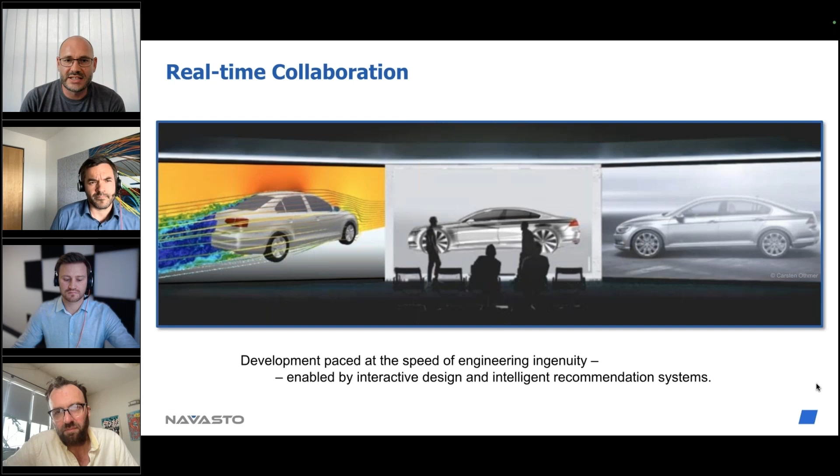And one of the examples that came out of that is, for example, the interactive design. On the next slide, the video you see is mostly Blender, but in the back end, there is a deep learning model that can be accessed by simply clicking a button. So this idea of interactive design and disciplines working together like design, like aerodynamics in a room is what's on this screen here.

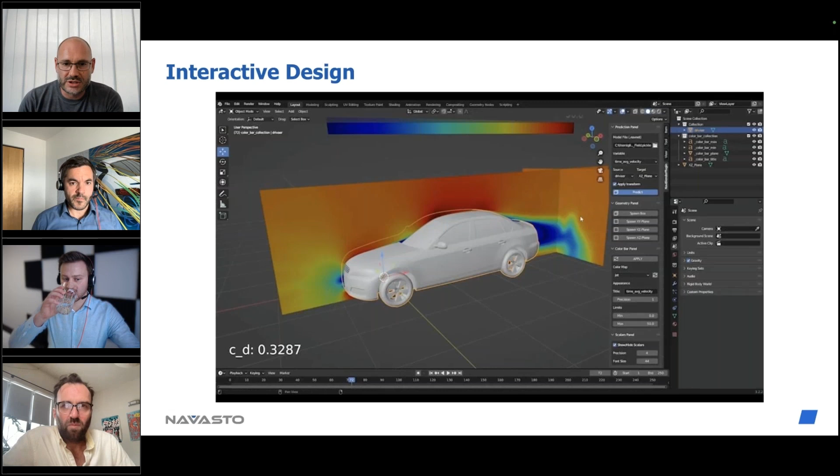So you can simply grab the mesh, modify the geometry, and instead of exporting it and running a simulation, you can query the deep learning model, you get an insight into what's happening in real time, and you can then decide what's the next best step. So this is one of the benefits, one of the use cases we see, bringing together engineers and designers.

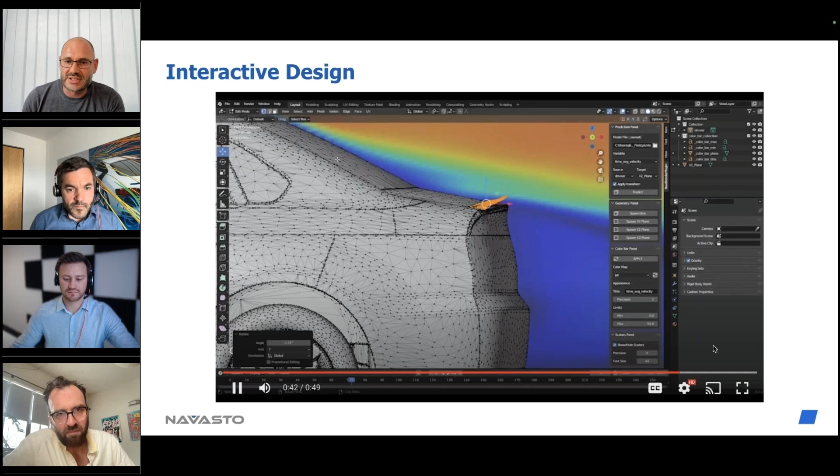And once you have such a predictive model in place, the next logical step is, of course, to also couple that with a generative model. So if you go one slide further, exactly. So on the left-hand side, what you see is a geometry that's created using a neural network that can be exported and used directly for a simulation, but it can also be coupled to a well-trained deep learning model.

So what you have here is a way to create a geometry, a way to evaluate a geometry, and if you couple that with a machine learning based optimization tool, for example, then you can close this loop and you can evaluate hundreds of geometries in parallel on GPUs, and really over the time it takes you to get a coffee, find either an aerodynamic optimum, for example, or scan the design space for possible solutions.

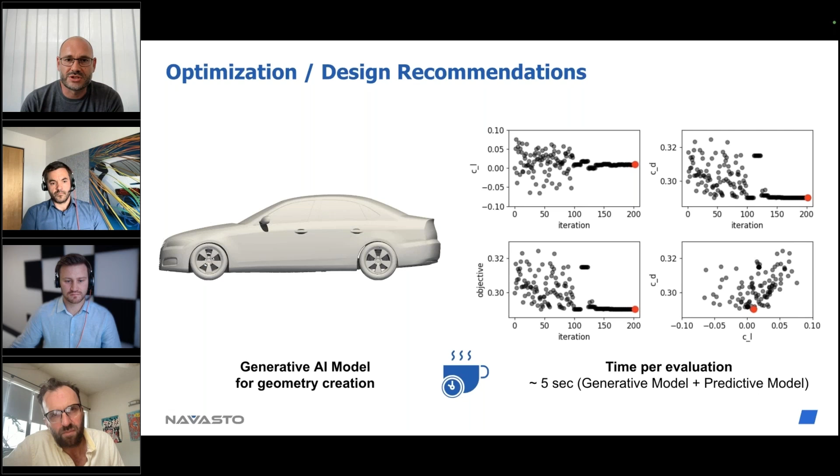So at the end of the day, I think the most important part when using machine learning and deep learning in the engineering context is the pick of the correct use case. And examples of that are the left shifting of physics-based insight, like illustrated in the interactive design tool, optimization and design space exploration. It's a side-by-side integration as SimScale has built it. And of course, I think in the midterm, it's going to connect the company knowledge, all the data that has been produced and is produced in those large engineering companies with the workstations of the end user.

Perfect. Thanks, Matthias. So yeah, the final introduction is over to David for the SimScale side of things. Thanks, Steve. So Steve said it initially already. I think you said it. I'm committed to it. If you do one slide more, I think there we have it.

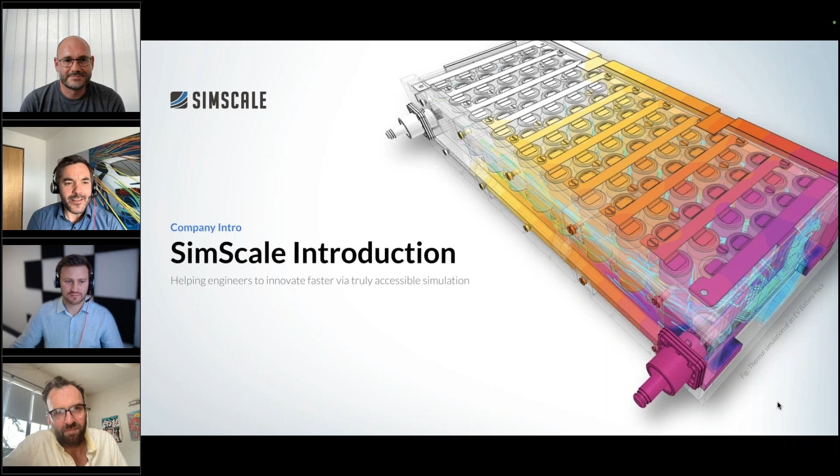Yes. So we see ourselves on a mission to help engineers innovate faster by making simulation truly accessible. And yes, this is a bit of a marketing slide, admittedly, but in that statement rings that SimScale is not about one specific method, one specific solver, one specific preprocessing technology. It's about how can all of this technology be deployed into broad engineering teams, broader engineering workflows, into the design loop to enable an engineering organization to explore the design space faster, deeper than they could before.

And so for that, we started off, and still most of our usage today is on traditional PDE solvers, finite volume, finite element, LBM solvers. But they are deployed into the loop, and we've seen that, Steve, if you go one further, to effectively deploy simulation broader into engineering organizations, it's not sufficient that you just have one well-functioning method or one well-functioning solver.

It starts with the fact that you need to manage all of the data that's being produced, and then you need to manage users and processes around it. How can you enable a program engineer to make informed design decisions without knowing which specific simulation method has been used? So there's a piece around process management and governance, which we can see in the top right, user and process management. Then all of that needs quite a bit of computational horsepower, depending on the method, depending on how many simulations you want to run. So you need to build in HPC management, HPC provisioning.

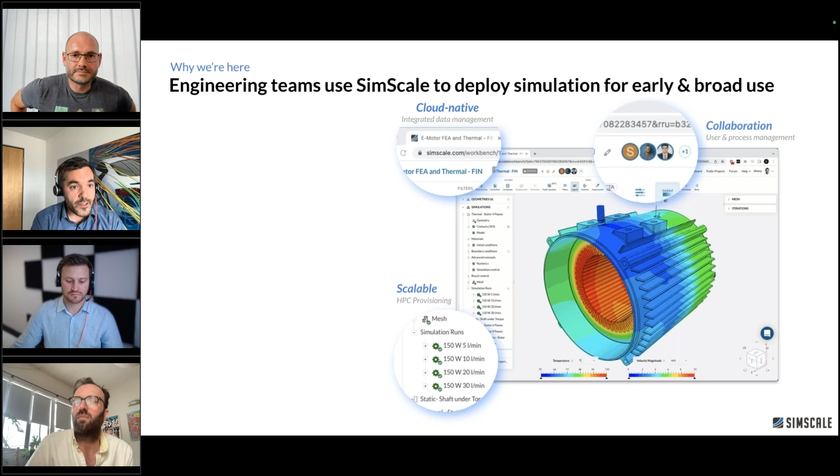And lastly, typically many different physics govern most of the modern products that are being developed. And so that's the platform we've built with SimScale. A unique vertically integrated simulation platform that brings all of this fully integrated, and not user, data and process management as an afterthought. And so what our customers are then empowered to do is build out simulation workflows centrally, then deploy them broadly with this user, data and process management.

And now it turns out that in order to deploy simulation broadly, there are very similar requirements to deploy AI-accelerated simulation workflows in a similar way. Because you also need to manage data, you need to manage processes, you need to start managing an AI model lifecycle. And so it turns out that the basis for these broad deploys of simulations is also a fantastic basis to deploy AI-accelerated workflows. And that was really the starting point for our collaboration with NAVASTO, integrating NAVASTO's technology into SimScale in a native way. We're going to see it later in action.

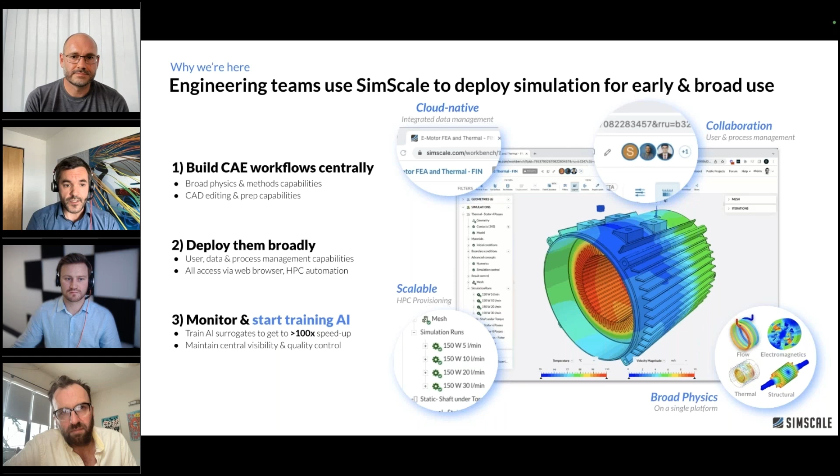And Steve, if you click one further, because what's now happening on SimScale is that all of the data that's being produced along a simulation process, from CAD over CAD preprocessing, physics setup, meshing, result generation, all of these steps generate data. Wait, Steve, not this fast. Maybe I'm doing too much hand waving.

All of the data, because SimScale is cloud native, lies in the cloud. And so everything is now there, structured in databases, accessible, properly versioned, etc. And right next to it is practically unlimited compute power, GPUs, to start tapping into modern ML techniques to train on that. And so all of this is now aggregated, ready for training. And so what we've built over the last couple of years, Steve, if you go one further, is a couple of first steps of how AI can accelerate the simulation process.

And moving forward, there's more potential to accelerate the process, with helping in pre-processing CAD and mesh generation, simulation setup suggestion, as well as something like Matthias showed, design insights, to evaluate the actual design performance and inform the next iteration. And so we are fundamentally convinced that most steps in an engineering workflow, and today Matthias and I come from the simulation space, Duann will cover this a bit broader, many of the tasks will be augmented or accelerated or fully automated with AI techniques.

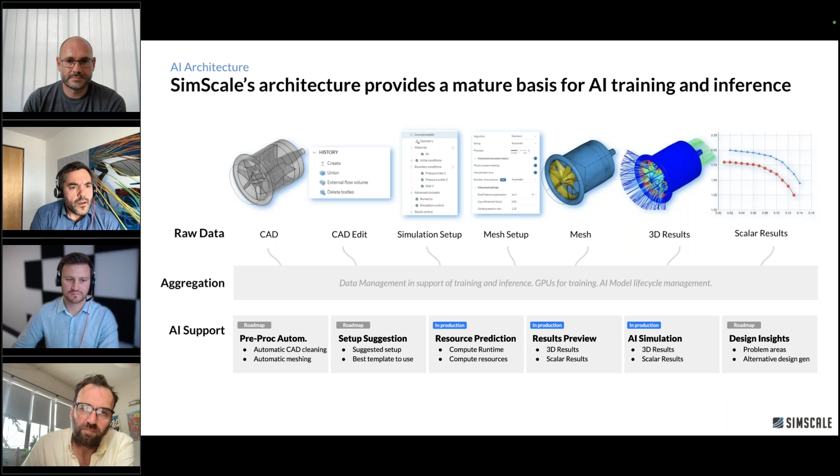And the way we think about it is that because SimScale is in the cloud and we're focusing on the simulation workflow, every step in the simulation workflow will eventually be AI augmented. Steve, one last slide. And so we're excited about the AI integration with NAVASTO, where so far we could do cloud native partial differential equation simulations. And now as an engineering team naturally starts producing this data with standard PDE solvers, Steve, one more, suddenly more and more data is available.

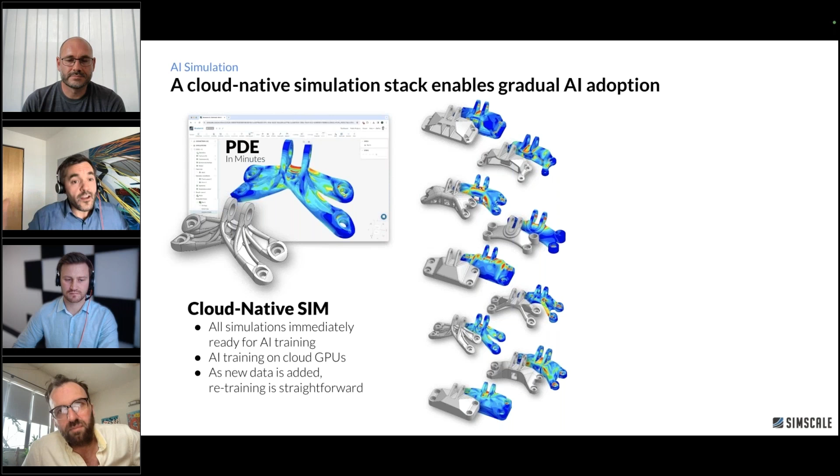And because it's already there, it's not an IT project anymore. It's not a huge data gathering effort anymore. It all sits in the cloud next to compute. We can leverage the data with the NAVASTO integration and directly train deep learning surrogates and evaluate physics in real time. And that's our point of view on all of this: SimScale, again, is not about a specific method, but about how a modern simulation stack needs to look in order to unlock broad simulation and eventually also AI-accelerated simulation.

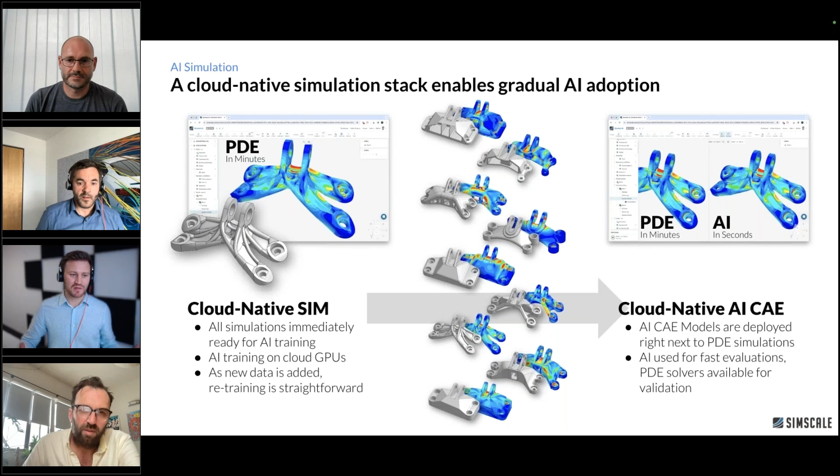Brilliant. Thanks, David. Yeah, I think for the audience that really helps to understand why these three people are here today for this discussion.

What we're going to do now is take you through a few questions and go down a few avenues of things people are typically looking to understand in this space. We'll look at what are the common concerns, challenges and fears associated with AI. Many leaders in computational design are wondering when the right time is to implement AI and if they're ready for it, and how they can get started and put the processes in place. A common question we get virtually every time we show AI in action is how much data do you really need for this to work. And we'll look more philosophically at how AI is going to impact design and simulation in the next decade.

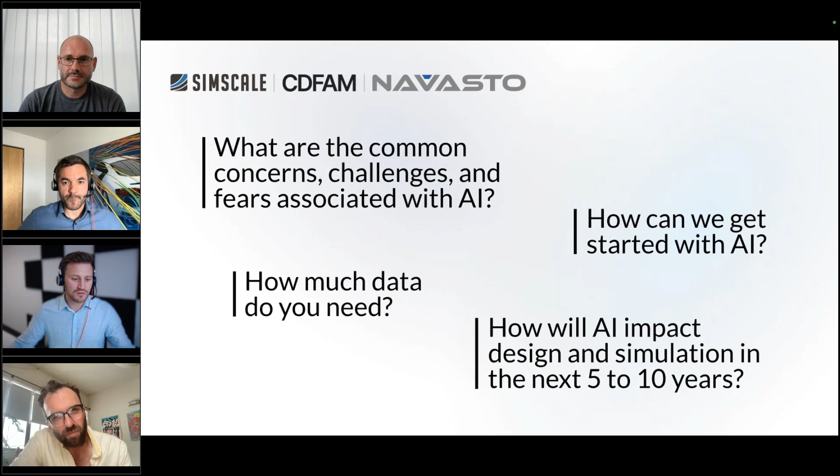So in order to do this, I initially want to start quite broad on the discussion here, and we're going to consider how AI is impacting digital design. For that, I'll hand the question over to Duann in a moment. Then once we've covered more generally how AI is going to impact the industry, we've got Matthias and David to delve a bit deeper into how exactly AI can be used, specifically talking about graph neural networks and machine learning models for engineering simulation.

AI is such a broad topic. So firstly, Duann, how do the CDFAM attendees consider AI, and what do you feel are the common concerns and fears associated with AI in the industry?

Yeah, I think what's interesting, as David mentioned, is the data collection and preparation. A lot of companies feel flat-footed when it comes to preparation for adopting AI, and the fact that using SimScale automatically starts capturing and preparing that data is interesting. There's an interesting chart by a researcher called Monica Rogati, the data science hierarchy of needs, which talks about the need to go from collecting to moving to storing to exploring to transforming to aggregating to learning to optimizing, and then finally you can actually start using the data. That sounds like a lot of work, right? Someone has to choose the right data to use. I think this approach of starting to use tools like SimScale in the cloud means you're sort of doing the work for free while you're preparing existing designs.

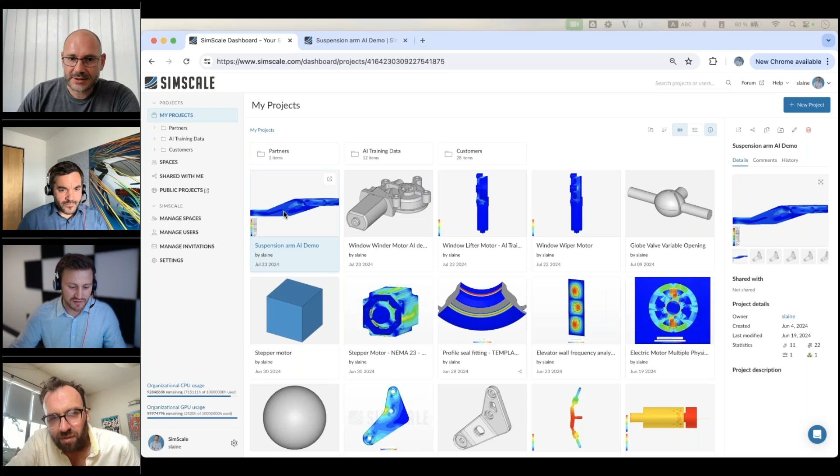Okay, so if I go to simscale.com, I can obviously access all of my simulations, etc. For this example, I'm going to use a bracket - this is a suspension arm bracket where maybe I've got an initial design, a concept design purely with the shape. And I can leverage the fact that I've done many simulations of similar brackets, and I've built a machine learning model running on NAVASTO's technology so that I can predict what the stresses are going to be on this part. I can very rapidly iterate through the design, make changes, and assess how that's going to impact my part.

So I can see here the von Mises stress. I can see I've got an 88% confidence rating.

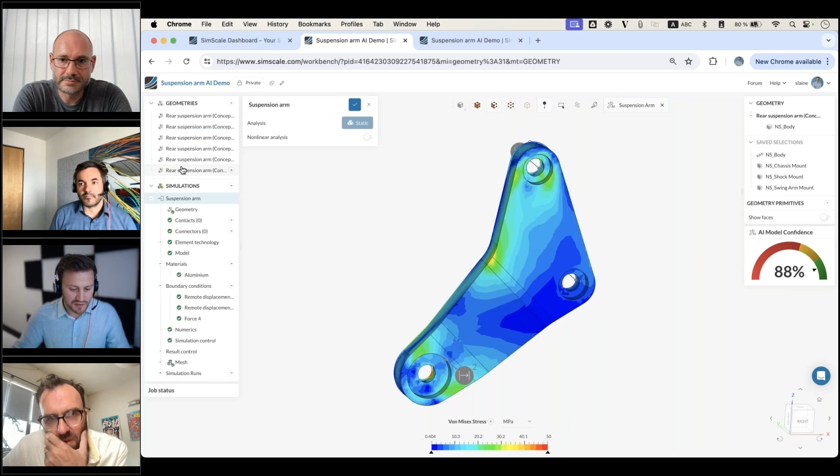So I know that this isn't necessarily extrapolating outside of the data set that I've got. Talking about what Matthias was saying, you need a measure of how good the data is. So say, for example, I want to do some what-if scenarios on this bracket, and I could see that the stresses were fairly low there.

So I might want to actually edit this geometry and save some mass and material by reducing the size of this by 5 millimeters. So I can do that live in SimScale. I can adjust the geometry, and then swap out my geometry for this alternative so that I've got the new geometry and have the AI prediction live on that.

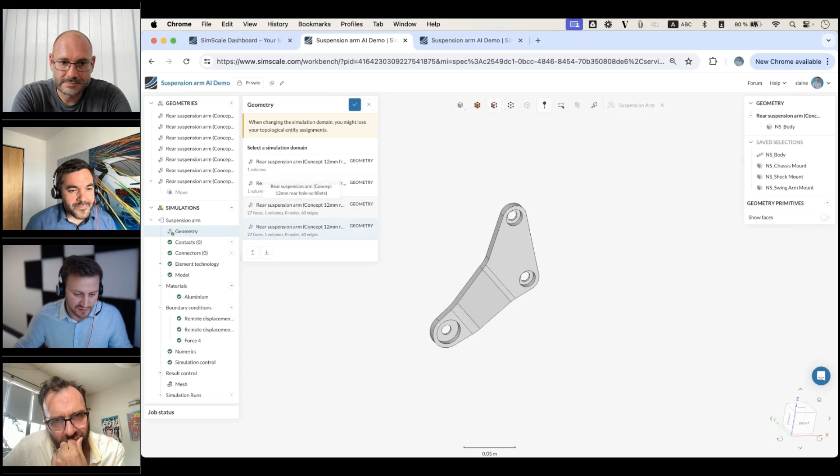So I can really make rapid changes through the design, swap out the CAD, and then immediately get a prediction of what the stresses would be on this new geometry without having to swap out to CAD tools, without having to spend a long time creating new iterations.

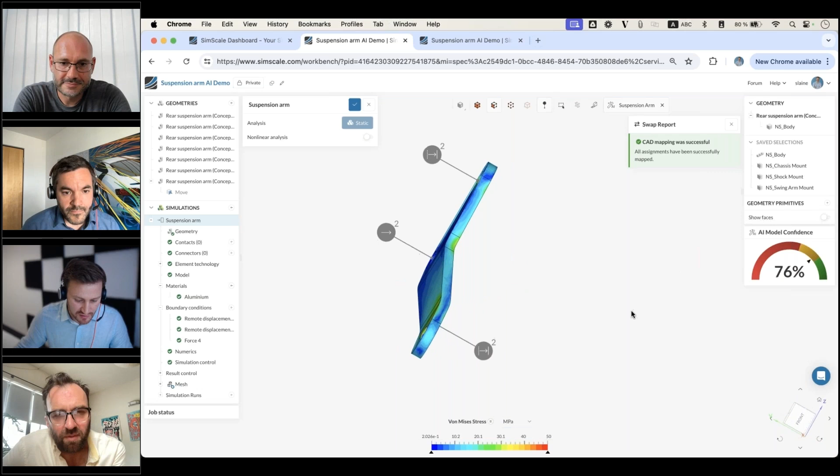So I can see there obviously the changes in stress that I've got on this part, and I can make much more drastic changes as well. So say, for example, I wanted to remove some material from areas where I've got a relatively low stress region in this part. I can quickly make changes, change the material, change the forces and boundary conditions, and make informed decisions about how this is going to affect the stresses on the part, and get an understanding of what I can do to optimize this design.

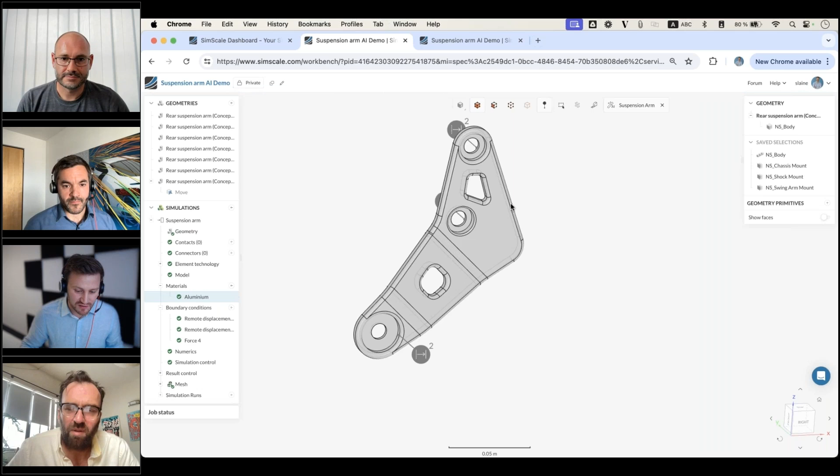So we've gone from a very simplified, basically near net shape part. We've changed the thickness and added some cutouts in the low stress regions. And then we can see a much more advanced geometry with the stress prediction live on that. So we've got a much more optimized part.

We've added in the fillets, and this is quite different from some of the training data, so you can see we've got a slightly lower confidence rating. So maybe in order to get a much higher confidence rating, we need to build some more simulations into this model, but we could very easily run those live now in SimScale.

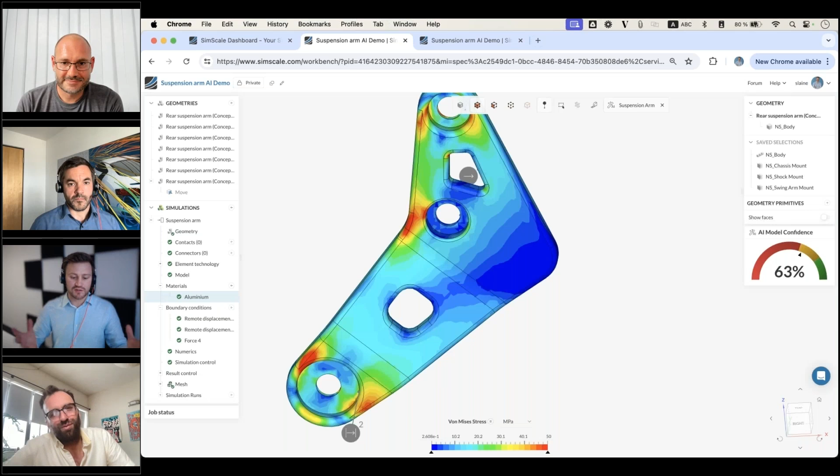I could start a simulation, and when I've got that result back, I just feed it back in to the machine learning model. Now, I'm sure you're asking how accurate this is. That's fine that we can do all of that in seconds and iterate through the design, but what's the side-by-side comparison?

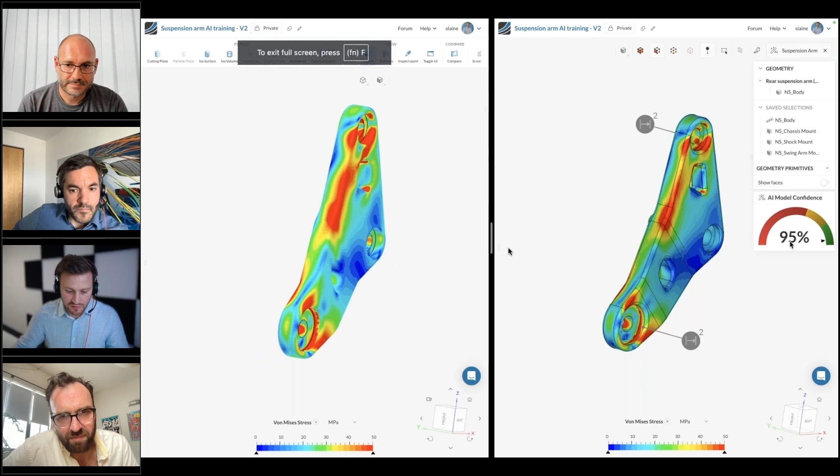Well, on the left-hand side here, you can see the PDE solve of this bracket, and on the right-hand side, you can see the AI prediction with the same scale bar. And you can see that 95% confidence interval is really accurate. We've got an excellent prediction of the stress fields on these parts. So if that confidence interval is high, you can trust the data.

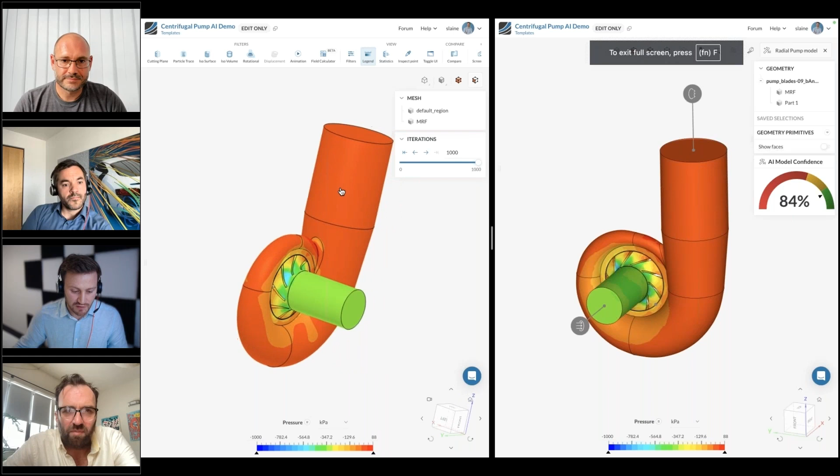And this is obviously physics agnostic, so whatever simulations you run in SimScale, you can also use the NAVASTO prediction to predict what those physics would be. So here we can see a radial pump model. Again, the left-hand side is the PDE solve CFD in SimScale, and the right-hand side is the AI prediction. So very good correlation between the pressure fields.

Okay, so super quick demo, but AI is super quick. So thank you very much for your time.